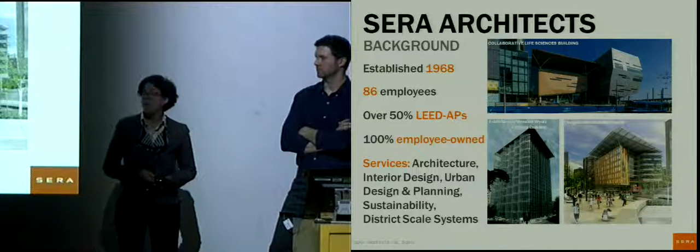These are some of the projects that we're working on right now. The Collaborative Life Sciences building, the top image, is in the South Waterfront in Portland. It's a new classroom, research, dental clinic lab for Oregon Health Sciences University, along with Portland State University, as well as the OUS system in general. The Oregon Sustainability Center here is a project that we designed meeting the Living Building Challenge, and the Edith Green Wendell Wyatt project that just opened this past summer, a LEED Platinum high-rise that's projected to be meeting the 2030 challenge. We'll quickly go over a couple of these in the slides just to warm up. It was actually kind of a progression for our firm on how to do integrated sustainable design. So we're going to quickly hit a couple of these projects on the way to EMU.

Quickly about our office. We are located downtown. It's very old town downtown, and that was done on purpose. We wanted to locate there to reinvigorate the streets. Sometimes coming out of the office at 4 o'clock in the morning, it's still a little scary, but Lisa knows more about the LEED. This was before I got there, but I know that downstairs we did LEED Gold and upstairs Platinum.

By the time we finished downstairs, we were already too big and had to punch a hole and go upstairs and take over the upstairs. I would say part of what I brought to the firm was when I joined, I said I have to have a model shop and I have to have a chop shop. And within the first 6 months, we have it.

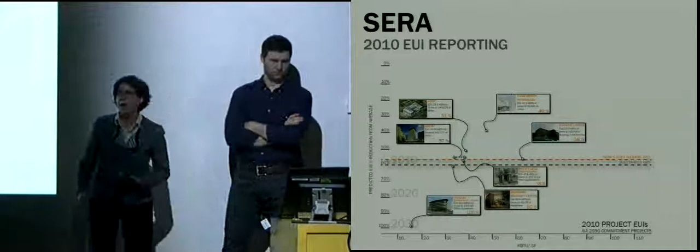Another important aspect of our firm is our commitment to the Architecture 2030 Challenge. And so we've been tracking our metrics since 2010. And basically we look at not only the predicted EUI, but also lighting power density, and use project energy modeling to help us to understand how we can position our projects. And that's particularly important as you start to look at how you can go about meeting the Architecture 2030 Challenge.

So this graphic is our 2010, and what you see on the y-axis is how close a project is to meeting the net zero requirement. If it's 100%, it means it's meeting the net zero requirement, or it's a net zero project. The EUI is actually what's on the x-axis, and so depending on the project type, the EUI would vary because, of course, what you're doing with the 2030 Challenge is you're comparing to the building that's a typical building for that particular building type. And what you see is SERA's average with a net zero project at 58% is barely just about at the 2030 Challenge at that time at 60%.

It's a tough challenge, and I know the University of Oregon has signed on to the 2030 Challenge, so I wanted to let you all know that as we're tracking this, it's tough, but we're out there trying to make it better, to make sure that we see how we can achieve it as we go along.

They tried to really evoke that emotion, and the reason I bring that up is we'll talk about this later on in the presentation, is what I try to get out of a client working with a large group of people is to get the touch, taste, and feel, the emotion of the project. If we could get that, if we could communicate together on that level, then I think the architecture starts to fall in place. So I was very impressed with this building.

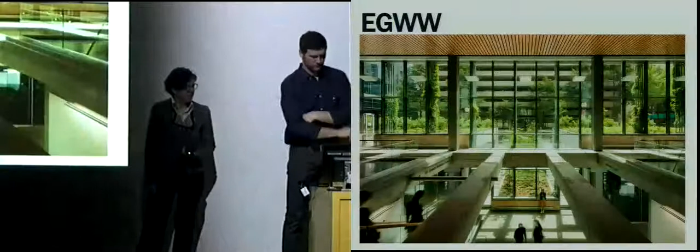So one of the important aspects that Jim really wanted to emphasize was to maintain the existing building character as we created this new high-performance high-rise. And so as you go inside, the old concrete beams were retained, even though we punched holes in them to allow natural light to go down to the main conferencing floor. And so it was this kind of juxtaposition of the new and the old as we went through the entire design process.

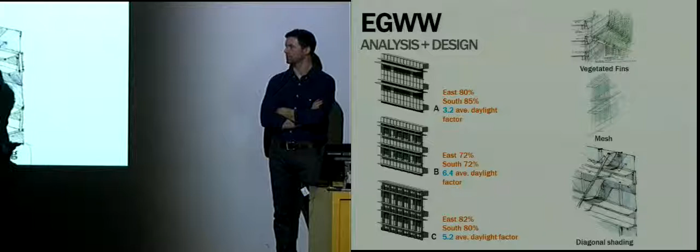And one of the important things that we looked at, and the reason that Walker and I wanted to do this together, is the idea of design and metrics working hand in hand. And so we first came up and looked at a series of daylight analysis and shading analysis to come up with some potential schemes that could work and meet the goals of the project, which we needed to meet the ARRA legislation requirements, which essentially are in line with the Architecture 2030 requirements. But then Jim went about sketching in the same way that Walker's doing, and it's this hand-in-glove idea, and we think that makes design better.

Same thing with the Oregon Sustainability Center. This was on a very tight site. Basically, the site dictated the shape of the building, how they're going to get to net zero. Lisa could talk more about that, but I think the beauty in this building is the fact that it was formed from the metrics.

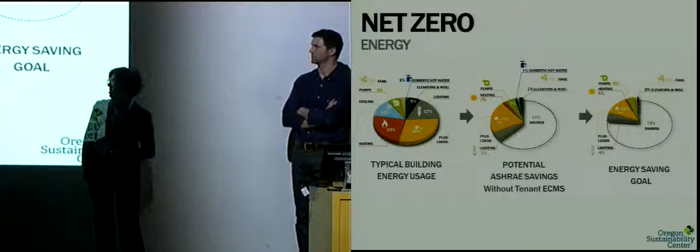One of the things I always like to talk about, I didn't even know John was going to be here, and I put in my favorite slide, is that we as architects can't do the design alone. We need to also rely on the building occupants. So what this is looking at is how do you go about achieving net zero energy. The energy pie on the far end is the typical building. We always start with what the uses divide up into in terms of the energy pie.

And then as we start to look at all of the ECS strategies that you've heard about in your class, natural ventilation, passive cooling, passive heating, solar, photovoltaics even, we still can only get so far towards a net zero building. Particularly with the Oregon Sustainability Center, with its very tight site, we needed to go even lower.

So we asked the building occupants, would they be willing to impart some different strategies, what we called occupant engagement, to further reduce the overall energy. Much to our surprise at the time, they said yes, we would like to employ things like having the janitors come in during the business day so we don't have to have that extra half hour or two hours of lights for the cleaning staff. No, we don't need super hot water in our bathrooms. And yes, we're willing to adopt different computing technology to bring down our overall goal.

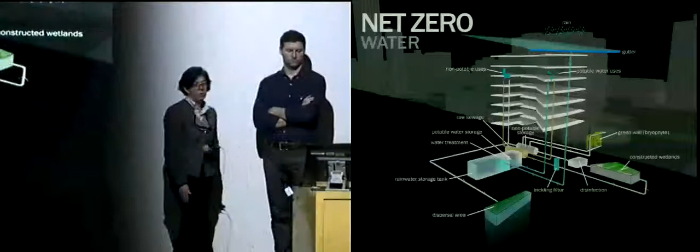With the occupant engagement strategies, using stairs instead of elevators, we were able to achieve the overall goal of the Oregon Sustainability Center on site with PV. And then that PV turned out to be what we needed in terms of the overall collection of rainwater.

So what this diagram is really showing you is the parts and pieces of the overall rainwater, or net zero water, collection strategy. But I wanted to point out how the photovoltaic array and the water system became hand in glove, jointly working together. We're always looking for what we call a twofer or a threefer. How can you have one thing that does more than just its single solitary purpose? Is there another purpose? That's another theme you're going to see as we talk about the EMU project.

So quickly, a little history on the EMU. I'm sure everyone here knows more about it than I do, maybe, but I did do quite a bit of research on it. I thought it was very interesting that it started off, it was Ellis Lawrence, it was the last building he worked on. It took almost 15 years from the time he started sketching it to the time it started to get built.

So it was taken over by his son, and I think that might be some of the reasons why it might look a little different than the other Ellis buildings. It's the most, I guess you could say, modern building on campus. It's a little bit more austere, a little bit more minimal, but as you'll see when we go through some of the analysis we did on the building, there's actually a lot going on in this building. It did a lot for the time.

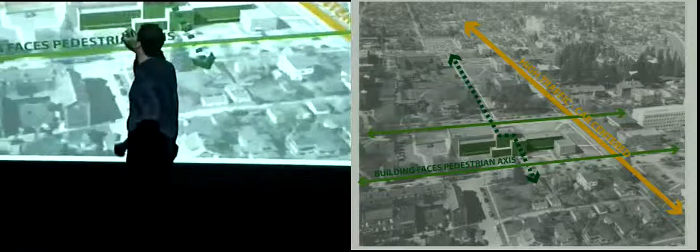It sort of on purpose got away from 13th a little bit, because at the beginning that was all cars. So this was very car-centric, and pedestrian access was actually in the north-south direction, and it had a very lineal, progressive layout. It lined up with all the axes on campus, and it had a very formal front and back—you would drive up to this main set of stairs. Now that times have changed and we're trying to really activate this street with people and not cars, that's some of the challenges we had with this building.

The 70s building, we looked at it and tried to do some analysis on how we could possibly save it, but it had very short floor-to-floor ceiling heights and was very inefficient. I do have a little story to tell about why it was a little inefficient, because we had some insight since it's what started SERA Architects. According to Bing Sheldon, it was built that way because someone in line got stabbed while waiting for food at the cafeteria.

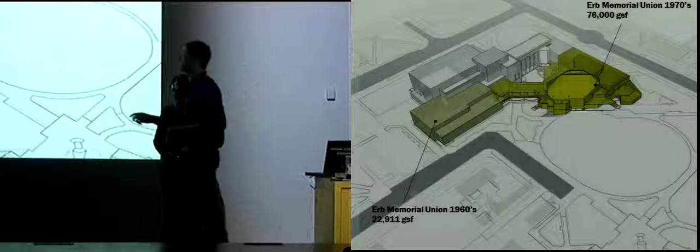So they said, what can we do to maybe break up some of these lines that are starting to come out the door, down the street? So the idea was, let's put food up top and make it a maze to get up there, so there's multiple ways to get up there. There's always a reason why they did things when they did it. There was also an addition in the 60s that's right now the fountain court. You'll see in the design we tried to use the 60s, but we just could not use the 70s building.

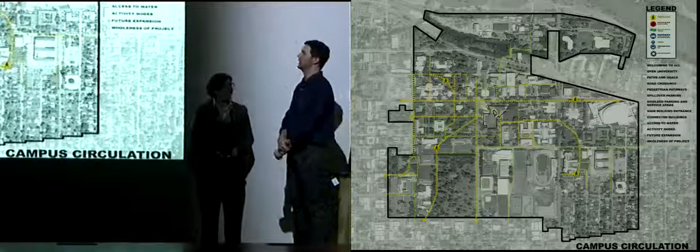I'll just quickly run through these because I think everyone here knows. But one thing I'd point out is we do student unions across the nation, and one thing a lot of colleges and universities would kill for is that this building is in the geographical center of campus. So it's already got a lot going for it.

When we work on other campuses, if something is located off to the side, we're trying to pull students to it. But right now, students walk right underneath the thing, or they walk around it. Next slide - lot of bicycle traffic.

Currently there is some bicycle traffic that goes under the building. It's actually not supposed to do that, so we're going to do a couple things to reinforce where bicycles are supposed to go. Some public transportation nearby, which opens up to the cars. This is what we were talking about earlier - we still have some car routes here. You'll see as we progress that maybe we'll do something to cut some of the car traffic off and give this back to the students.

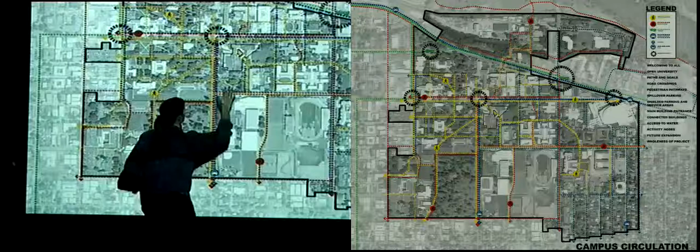A major node on campus - it's directly located. Another thing a lot of campuses would kill for is that it's right next to the major crossroads on campus, 13th and University. If you ask anybody where the center of campus is, it's 13th and University. But if you ask them where the student union is right now, I bet a lot of people wouldn't even know.

I come here every week, and it happens almost every single week - I'm standing right here looking at the building, talking to our fellow architects, and someone will come up and say, 'Do you know where the EMU is?' And I got to point - it's right there, but it's 75 feet back from the road right now, with 2 layers of trees in front of it.

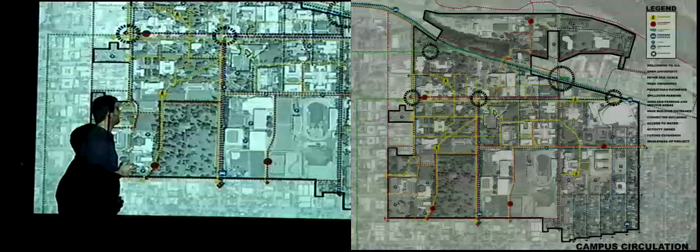So you'll see when we go through, we did a couple things to try to fix that problem. Up close, the reason I wanted to blow this up is there are also only a few places on campus that have parking. This building has parking as well, so there really is no back door to this building, and we have to deal with issues like trying to keep and maintain some of that parking that's here because it's vital for the conferencing that goes on in this building.

I want to point out again that right now people go under this building. So this was the big idea of the building - at the time we didn't really know how, but we said, how can we take this building and get people to go into it? Even if they walk through it for 5 minutes, grab a cup of coffee, read the paper, I think we've achieved our goal. We get more people in the student union.

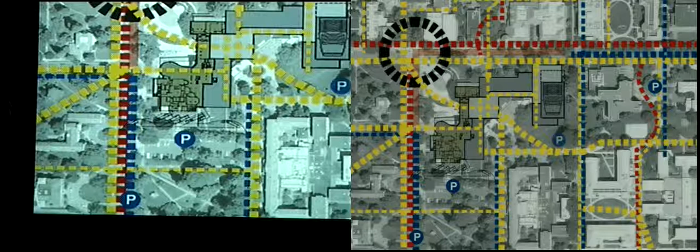Someone in the user group said a leaky building - not in terms of performance, but in terms of having a few front doors. So the idea is to start to capture some of this traffic that goes in. You're coming into this historic area - right now you go under the building, and what we're saying is very light intervention because this is the most historic facade in the building. Maybe we just do a set of glass doors, and now you come in - we'll show you later - you'll come into a double height space, a new hearth on campus.

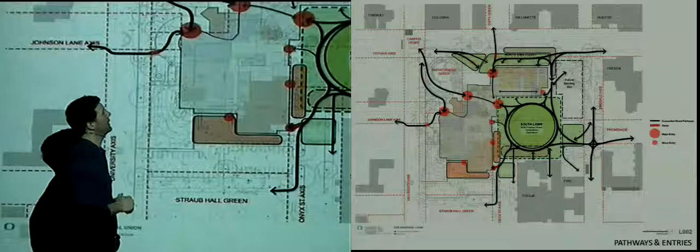Next slide. Another big idea was pushing this building north, getting it closer to the road. We went from 75 feet to 35 feet from the road. We've actually now increased our south lawn. This was very important to us to get more green to the south and less hardscape on the north. This is now going to be one of the largest south-facing lawns on campus. The design is set up for graduation, for events - a lot of it is key around the south lawn.

Another thing you'll notice is the multiple entries. A big concept is to get everything down to the ground floor. I'll go over that here in a little bit.

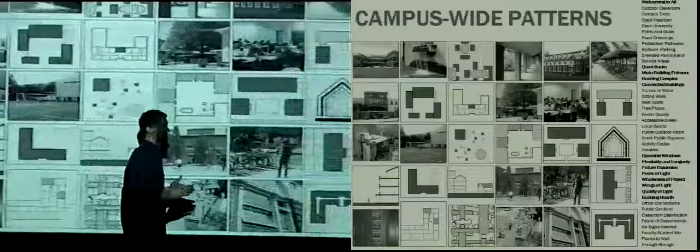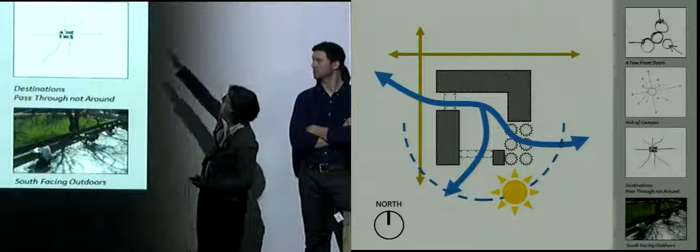Another important influence for the project was, of course, the pattern language. This is University of Oregon, so you need to involve the pattern language. Starting out the process, we went through and remembered our history of being students here and looked at the patterns. We ended up selecting these 10 as important patterns for us - things like being at the hub of campus, that's a great pattern for a student union, having a few front doors, the leaky building idea, the kitchen great room, who doesn't want the I Love Lucy setup? Light attracts use, that's a really important pattern for a student union, one of the overall prime goals. That was something we arrived at early on in the design process - how could we link these patterns together to come up with a partie that could describe the essence of this particular building.

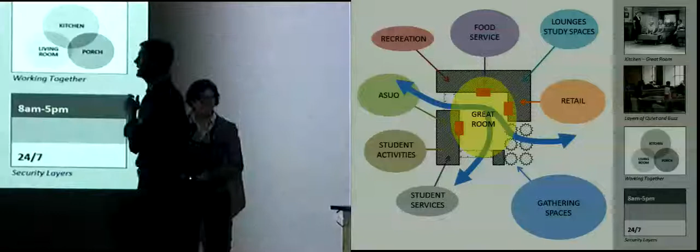Now we're going to start talking about working with the user group. We actually had these before we worked with the user group. We came up with them, and then we were asked to come up with patterns that you think are useful for this building and how that can generate some sort of idea for the building. So this is the exact partie we used. It was just this idea of creating some sort of park, some sort of great room that had multiple areas to bring students in through the building. Armed with the patterns, armed with this partie, and a lot of analysis on the building, we were able to then...

Meet with the clients, create goals, and some of the design drivers. This was day one, the very first meeting: recruiting students, timeless, multifunctional. We kept going back to this idea of timeless - we wanted it to be of today, but we wanted it to meld with the building next to it. Simple, enduring, not tech-based. I thought that was pretty interesting, that we're trying to come up with sort of a bomb-proof building. Simplicity.

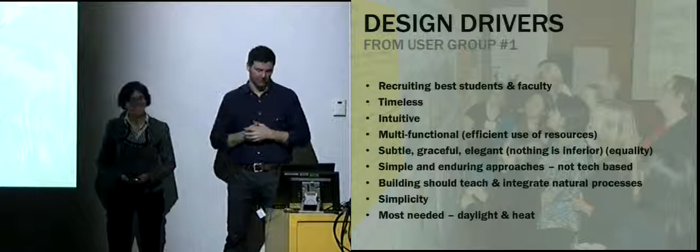Sustainability has been an important driver for the project from day one. The user group brought some of that, which you can see with their highest hopes and greatest fears - that was the list you just saw. We were also the first project under the Oregon Model for Sustainability, adopted in July of 2011. Energy - making sure we don't increase the overall campus energy - was one of the goals. Managing stormwater and making sure we manage the dirtiest water first was another important pattern. And people - making sure we engage the people, especially the students, in understanding the sustainability and how they're going to be saving energy and water in the building.

Those were really the three overarching goals, but we also wanted to make sure we brought some of these other elements. We started with a brainstorming session where we came up with three taglines of what we really wanted the building to be. We wanted to make sure it uses resources in the right way. We wanted it to be elegantly green, that it communicates to students and faculty what it's about, and that it strengthens and inspires the community. So these were really the overarching goals.

One of the things we like to do, which came from both the Oregon Sustainability Center and the EDITH Green Project, was to have specific metrics we could use to check back with the design team. If you have a specific goal, you're either meeting that particular goal or you're not. So we looked at these characteristics or categories and created specific goals. For example, in energy, our minimum goal was the Oregon model, which turns out to be 35% better than the typical standard.

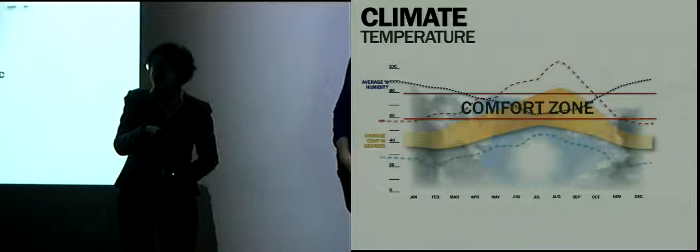I actually had an email from campus planning today talking about our student street and how many hours of the year is it going to be above that comfort zone, 85? And is that okay? And when are those hours? And is it okay to be above that temperature, or do we actually need to provide cooling to make sure we go into the comfort zone? And, you know, different people can disagree, but maybe it's okay to wear shorts on those days. Who knows? I guess I'm tough. I'm pushing to keep the student street. We could cool with fans.

So as we go through, the design process that we follow would be to look at the climate, understanding the base building loads, understanding how our building compares to the 2030 challenge or other goals, look at load reduction through passive strategies like natural daylighting and passive ventilation, address the building envelope because that's a part of the building that's going to be there for a long time. And then we start to look at the mechanical systems, making sure that they're right sized, that we have dual use, we incorporate heat recovery.

And then, of course, this idea of occupant engagement. That's something we want to bring to all projects because the people are really the users of energy, and anything we can do to help reduce energy load from the people is something that we want to do.

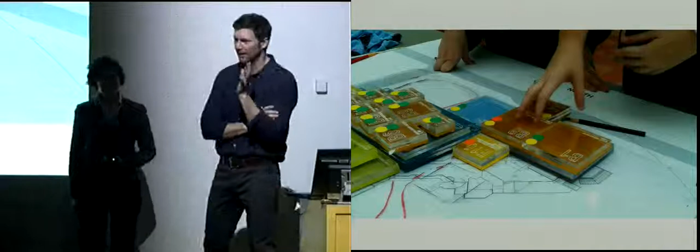So quickly with the scheme, we thought about this for a few weeks as a firm, and I don't think we reinvented the wheel by any means, but I am going to show the techniques that we used, and they were very well thought out, and they were geared towards working with a large group of people. We weren't quite sure how large, and it was 20, 30 people in the core group, and then we had students who would come in and out depending on the meetings. So it could be 50, 100 people.

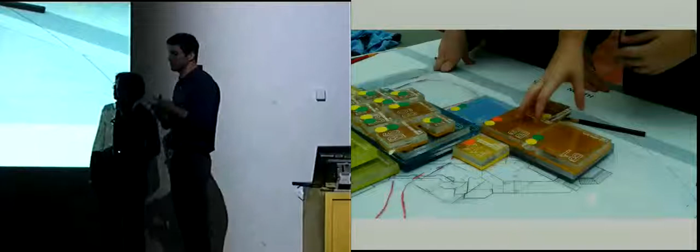We wanted some way to physically show the building on the site, and what we came up with was this idea of color coding the blocks for program, and then putting it on a site with a piece of plexi underneath it that I could physically draw on while we were talking, to start thinking of paths, maybe some other space that hadn't been thought about in the program, and that was stuff that I could sketch on the plexi itself.

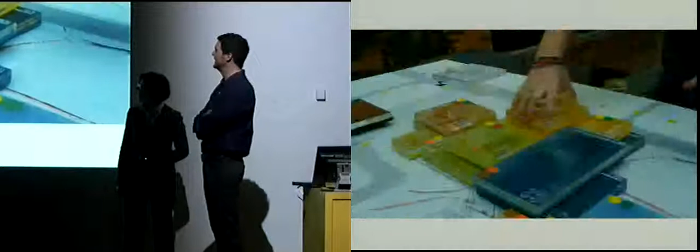We also introduced with these blocks the idea of energy programming. And so each of these are color-coded according to the program, like things together. All of the food service is one color, all of the student unions are a different color. But we added these additional dots to indicate whether the space wanted daylight. It had a yellow dot. If it didn't want daylight, it got a gray or a black dot, depending on the need for daylight.

We also looked at the heat capacity and whether the space would be rejecting heat or needing heat, and color-coded those in a red, yellow, orange scenario. We looked at the times of use for those particular spaces, and we had people first group them based on their typical programming, and then we said, well, you've got a yellow dot in the middle of your overall block. How's that going to work from a daylighting perspective?

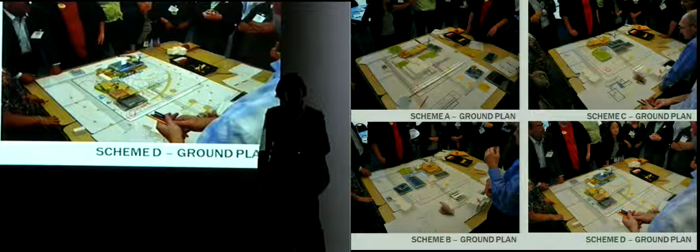Is there another way that you could do that, which would get all of the yellow dots, for example, on the exterior? And it was a really easy way for people to communicate and see not only are they developing the adjacencies that they want from a true programmatic perspective, but also from the idea of energy as well. So from that, we were able to come in one or two meetings. I can't remember which one. Well, we did the first 4 schemes in one meeting, and then got to the single scheme.

In the very first meeting, we hunkered down, spent all day, and were able to get these 20 or 30 people in the room. We took the blocks and we would arrange them on site, and as you can see, I would start to draw, like I said, that soft space, or maybe some other parts of the program that were not thought of originally would get drawn on, but we were quickly able to come down to 4 schemes, and I'll just quickly walk through them.

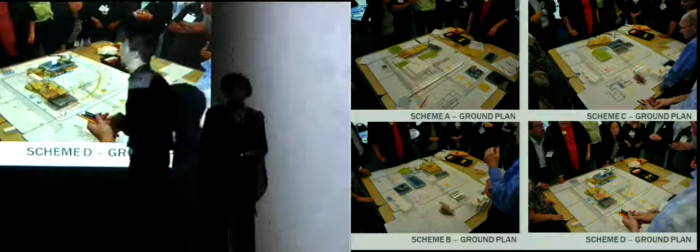We'll go through them, but one was sort of a double-loaded atrium. Scheme A, we're just giving them letters right now. Scheme B was, again, more of a double-loaded, but it was in a different orientation, more of the north-south, and we'll go through and we graded all these sustainably as well. And then Scheme C,

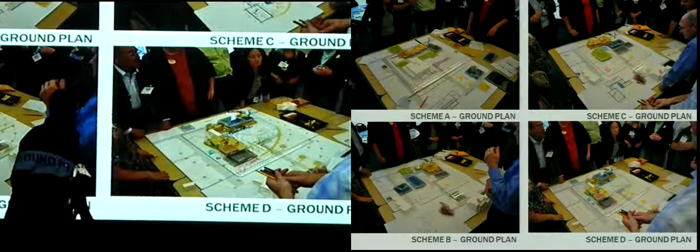this one we quickly lost because at the time, we had a performance hall on the backside, and it didn't allow for good access to the performance hall, so that one was dropped. We've since lost the performance hall, but at the time, that one was dropped. And then Scheme D was more of a single-loaded atrium facing south student wing, where we would try to locate as many programs that were appropriate for the 1950 building in the 1950 building.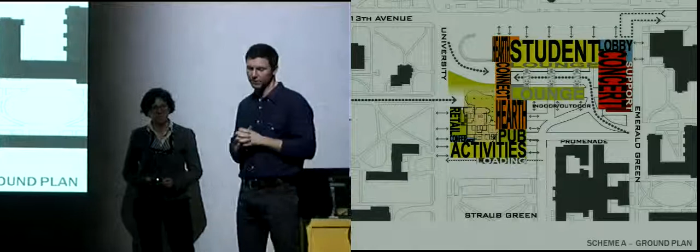So part of this thing that I was talking about, emotion, trying to get emotion from the user group, was we took those 4 schemes back, we stayed in the office for the week, and we tried to come up quick. These are not precious. Everything we do is try to not be precious. Instead, what we wanted was emotion. We wanted to just convey, these are not within inches.

These are sort of thumb up in the air. This is about the right square footage. This is about how this would fill it out on the site. So this is that idea of that double-loaded atrium, Scheme A, and just to quickly give visuals of everything we're at. That's why we use these large graphics, and we started to incorporate where some of the circulation would be.

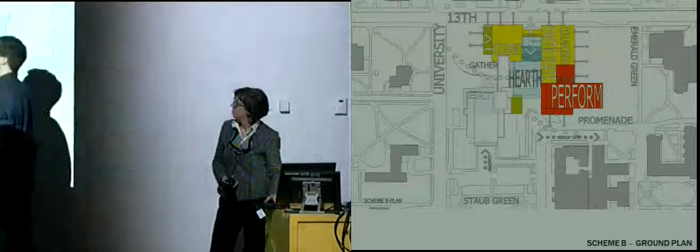Scheme B, again, didn't work so well because the Performing Arts Center, we said we would probably have to come off the back, and this would create parking back here, and there was a lot of issues with this, but this was something that the user group came up with, so we diagrammed it out, and this was one that we quickly lost. Scheme C, same thing. We diagrammed it. We wanted to show what the user group had come up with, but again, we sort of decided, because of the performance hall, that this was probably not a go.

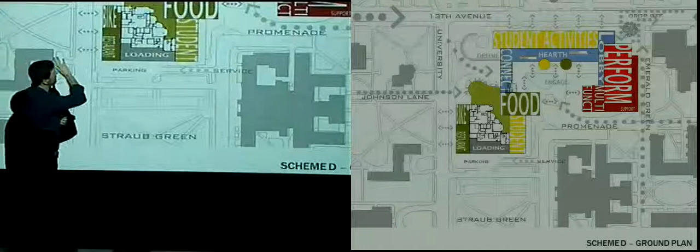Scheme D was this single-loaded atrium, south-facing, with a student bar facing north. I would say that one of the original schemes was to actually take the Mill Center chunk completely off and do all new student bar facing 13th, but we ended up not doing that.

So at the same time as Walker and the team are coming up with the diagrams, we're going through and testing them so that we can give the user group real-time information. So we do quick massing shading analysis so that we can understand not only what the building's potential is for solar and for daylight, but also is it going to be negatively impacting any of its neighbors.

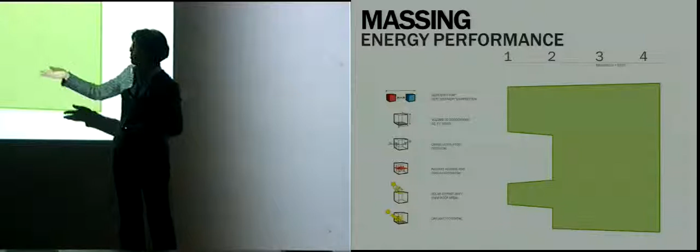We also run shoebox energy modeling, and we specifically looked at 6 things. The top one is how good would the scheme be for adjacency for heat recovery distribution? How well are the spaces aligned? What is the skin to volume ratio, which has a direct effect on your performance, the cross ventilation potential of the scheme, the radiant heating and cooling potential, solar opportunity, and daylighting potential.

And quickly read this diagram. The greener it is, the better, because we're grading the schemes, and if you got a 1, then you're all the way green. And so as you see, Scheme A had the most green, and Scheme B was really, C and D were second. But one of the interesting things was Scheme D had the top rating in 2 of the most important criteria, the potential for daylighting and the potential for cross-ventilation.

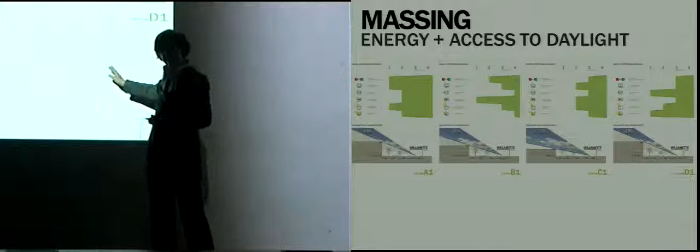And so the user group was very interested in Scheme D, but wanted us to learn from Scheme A. And so we ended up with really an amalgamation of Scheme A and Scheme D. And I think one of the successes of why we were able to so quickly arrive at a specific scheme was being able to, at the same time as we're giving them information about the programming and how the building is, we're also giving them real-time information on the sustainability elements of the overall design.

Once that was determined, once we had a couple of schemes, that's when we started to do a lot of work in model. And I chose to show more of the finished model, but there were many, many iterations before this. But again, on the models, I like to show circulation. I like to give a little bit of emotion as to what would be happening in this space.

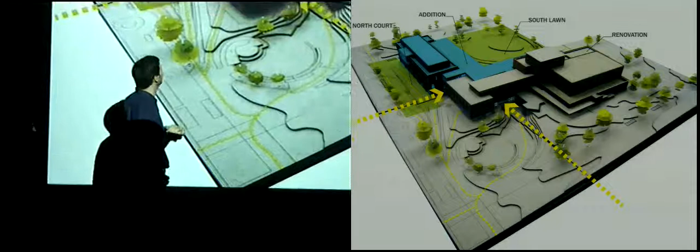Next slide. But what we ended up coming to as a conclusion for the group was that we would take this new student wing, efficient, super efficient student wing. It was not hard to be more efficient than the 1970s building. We pushed it 30 feet forward. So this is 13th. We decided on giving ourselves a plaza, a student street, we're calling it.

So we have the street, then we have a student street where I can imagine in summer they'll put tents out there. The bike program is located on the ground floor. They'll have all their bikes out there. It's a place where I think you bring what's happening down here, some of the markets that go on, and I think it'll continue right under the face of the new student union.

What we have on the back is that south-facing triple height, mostly glass. We'll talk about that in a little bit. And we've increased the south lawn; this is bigger than a football field, the south lawn now. And it's fairly simple architecturally, and that was done on purpose.

The user group wanted it to be flat, not a lot of trees in that space because they want to be able to have graduation there. They want to have ceremonies there. So there's a reason why it is fairly simplistic in the back. Next slide. This idea of the south lawn and this accessible building, this is right about the time when we said, okay, currently there's a basement and then there's a ground floor.

And so what we would like to do is turn the basement into the ground floor so that this south lawn now, everyone can come off the south lawn and walk right into the building. There were a lot of feats that had to happen to make that work, but if we go to the next slide. So this is just a figure ground of the current basement of the 1950s building.

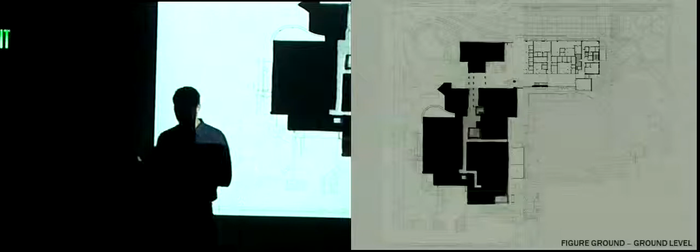And the reason I call it a basement is because there's very large blocks of program, tiny little hallways to get to this program, and that's where the student unions are located. You go down a CMU-lined hallway, and they're behind closed doors. And so, next slide. This is what we propose for the ground floor now in the new building. What can we do to really open it up?

And what we did is we took some of the more underused space and we tried to interject program, and I'll go through the program here in a second of what could be in these spaces, but really it was more the idea of, at the time, I didn't know exactly what we would do to make this happen or why, but what we wanted to do was really open up this building. So 440 is basically ground level. So now everywhere in the building you can come in at 440.

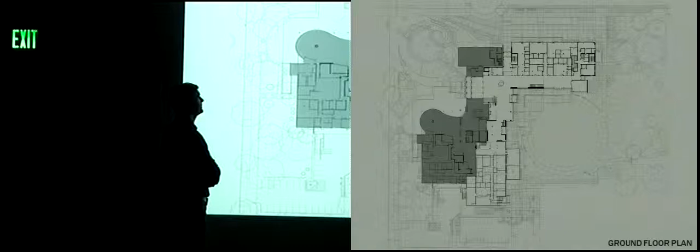This is a floor plan of the ground floor. Phase 1 is what we're doing right now. It was great to go see them. They're taking it apart. And before we can build the new student wing, we have to take the Craft Center, which is actually the #2 in the nation Craft Center. I was impressed. We toured a lot of Craft Centers. This is a very impressive Craft Center.

So we want it to be able to function, run. So it's going to continue to run while we build them a new Craft Center in the ground floor of the 1950s wing. It's very easily said, but then to put basically a shop in the ground floor of the 1950s building took a lot of effort, but we were able to figure it out. So phase 1 will be constructing the Craft Center.

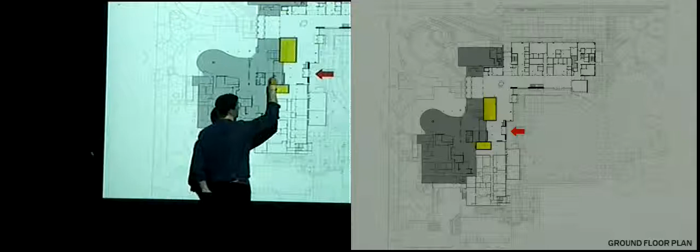Next. After that, what we're going to start doing is we're going to punch a couple of holes into this, and have communicating stairs. So now from ground floor up to the food, we have a grand stair with skylights above, which will bring light down. We've also said, okay, let's take this historic landing, historic entry to the building, and let's express that in the building. So we're going to have a grand stair that you come in off the ground floor, come up these grand stairs.

Now, with that space that used to be sort of the dead stairs, the center of the building, we've coined this the O Lounge. It's going to be a lounge space for the students. It's one of the only places in the building where we have the O, but we actually have a giant O on the ceiling that'll be very hard to read. It won't be blatantly in your face, but we've done a lot to sort of invigorate this space.

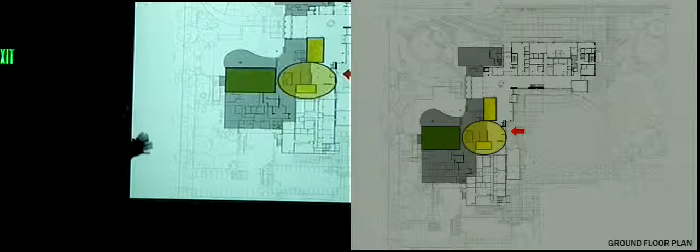And then off of that, this was back and forth and back and forth. It took over a year to come to the conclusion, but we are going to have a pub in the student union. Big round of applause. Yeah, nationwide universities went to this trend of let's get drinking off of campus, and then they realized that students would drink off campus and then drive back to campus. So now they're saying, okay, let's be responsible drinking on campus. So we are going to have a pub on the ground floor.

And again, it was one of the spaces that we couldn't bring a lot of light to because this is underground here. So I think it really utilizes the space well. Then we're going to build this new student wing. Like I said, we shifted it 30 feet up, so now the ground floor of this is the one spot again where we use a little bit more glass. It is storefront. And the reason that you have a storefront is psychological. We want people to see in, we want people to see out, we want to really highlight the uses that are in this space.

And then some of those uses are bike center, ASUO, sustainability, and what else? There's one more. Resource. A lot of student activity on the ground floor. And that will all be connected, next slide, with this atrium.

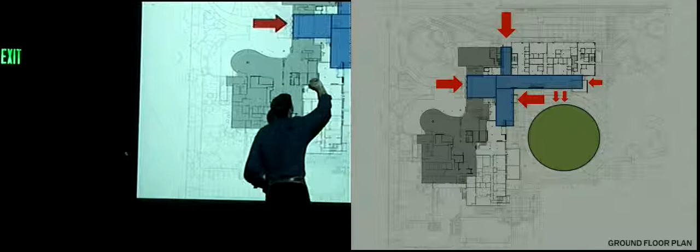South-facing, 3 stories, 2 stories, with a new entry on 13th, and then a very light touch off of the existing. Right now you go under. What we're saying is just maybe just plate glass. You come in. It's set up to where you can have a vestibule, so there'll be 2 layers of doors. You'll come into a slightly compressed space as you walk under, and then you'll open up into this new student street. And we'll show you some images of that in here in a minute. So all together, this is sort of the new ground floor of the student union.

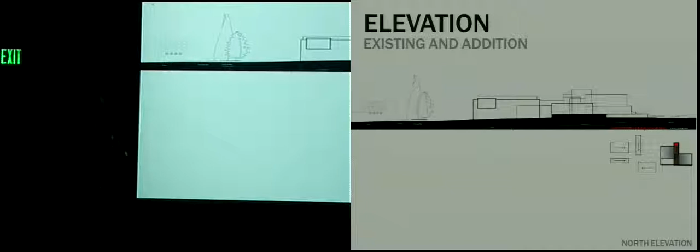We started off with just basically what was this existing 1950s building? How did it connect? What were the different volumes? What were the different massings? What we saw was that it really culminated around the center of this building, and then it sort of reached out in the landscape. There wasn't a whole lot of program at first, so I think it purposely sort of stretched itself out to be a little bit more commanding on site. We looked at different rhythms of the current openings around the 1950s, and how can we start to use that same rhythm on our new student wing.

Again, top, middle, and base. Very important to have a top, middle, and base. We wanted to show some ways that they did it on the 1950s building with this almost arcade middle, and then they had a very thin, which is a little different than the rest of the campus, almost blade-like top. And so we said, how can we do some of that same moves on our new student wing?

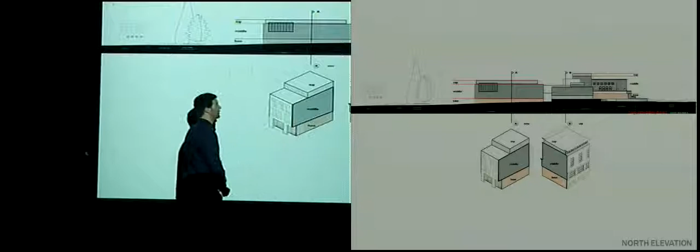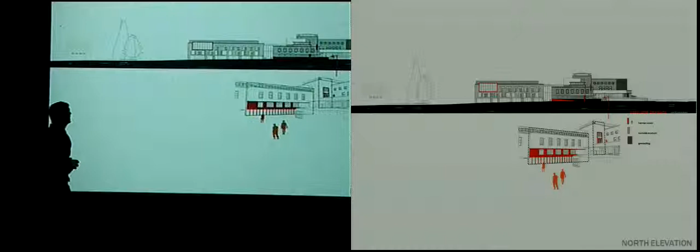And then there were a couple areas on the 1950s building that had, this is one of the only buildings on campus that actually has limestone. And so we are saying maybe in some of the areas we're going to actually use real limestone on our building. And they would group these large groups of openings together to sort of say, there's something here, special spaces. So we said maybe in our one spot that we used to have a performance hall, we don't have a performance hall anymore, but we do have a multi-function space. And in that space, there are going to be performances. And so maybe there's something special that happens here, and it's of higher quality material.

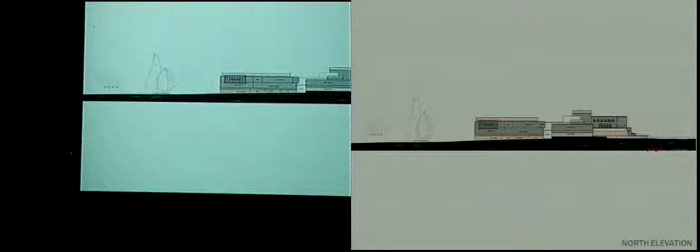And then lastly, we overlaid the program on it. We know that ground floor will probably always stay the programs they are, or very similar to those programs, and then maybe the middle 2 floors, we could program them more as office space, because they will be student functions, but the student unions, they fluctuate in size. A single office might grow or might shrink, so we want to keep the top 2 floors more office-like, and then that special space.

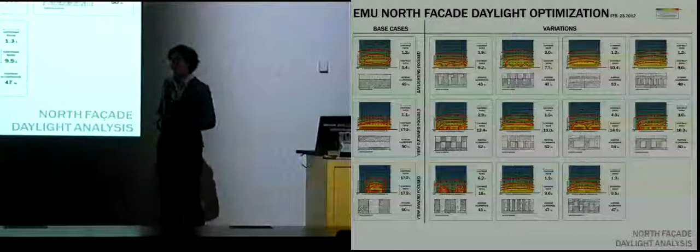So just like we did with the building massing, as Walker and his team was developing the overall strategy for the building elevations, we're also providing sustainability metrics. Now, how many of you know that Oregon Code mandates 30% glass? It does. You can get around it through different ways of modeling, but actually per Oregon Code, you should be starting out at 30% glass. And so we took that as literal. How can we do the best building possible?

At 30% glass, at the same time, we're going to meet our daylighting metric, which was a 50% daylight autonomy for at least 75% of the spaces, which means at least 50% of the time you have usable daylight in those particular spaces. So what we did was this analysis, and the base case is over on the left side of the screen.

First, if I just put my 30% glazing for the absolute best for daylight, I'd put it all at the top of the space, close to the ceiling, so I could get that daylight deep into the space. But that would be kind of a crappy building to be in, because you wouldn't be able to see out.

So then we said, well, if I was to orient it for view, where would I put it? I'd put it in that band that's between about 3 foot and maybe 9 feet. And you know what? It doesn't do so good for daylighting. All you can see is all of those red lines closely grouped, which means you have a pretty high contrast ratio.

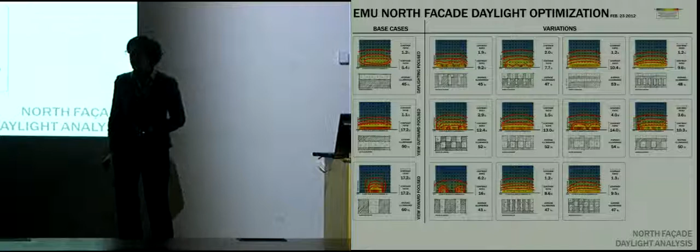And then what if we maximize daylighting for view in? Maybe we do a vertical slot of windows. And then we said, okay, well, how could we rearrange that same 30% glass in different patterns that take advantage of daylight and view in, and come up with a methodology to analyze them. We're looking at not only whether they're meeting the overall illuminance criteria, this 50% daylight autonomy, but also looking at the contrast ratio. How even is the light?

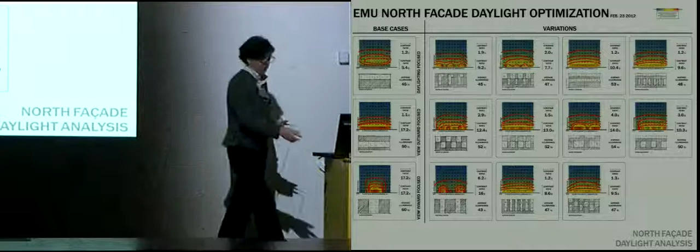Because really what daylight suffers from is if it's too bright at one side of the room, it feels too dim on the other side. It's not that you don't have enough light, it's probably plenty fine. But if it's too much contrast, then you're going to feel like that space is dark. So we essentially set 10:1 as our contrast ratio maximum, and said these three schemes all meet that 10:1 contrast ratio from front to back distance. So, Walker, any one of those, I'm fine with it. Just do that, you're done.

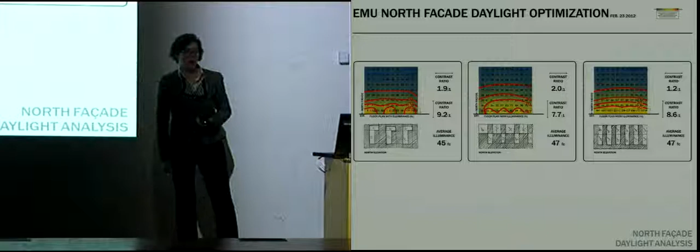So really what this looks at is how we're going about doing the metrics. We actually use a program called Diva, and it has a plugin that we've developed, a customized piece of software using Grasshopper, that allows us to quickly get these metrics so that Walker doesn't have to wait 2 weeks till I run all these metrics.

They can basically be run overnight, one day. Go back just real quick - these were just sketches. Like we said, I did 15, 20 of them. They were all just sort of ideas. They weren't meant to be exactly what was going to happen, but what it did is it gave me a really good baseline to then start working them into the elevations.

I'm also very big on, I know the daylighting, I know the metrics, I know the numbers, but I'm also very big on visual, on how I'm going to feel inside that space. Again, I want to go back to that feeling of being inside that space. So I wanted to take some of these arrangements of windows and just generically, quickly - all this stuff is quick and not precious - so that we could bring it back to the user group and have them weigh in on it on a weekly basis.

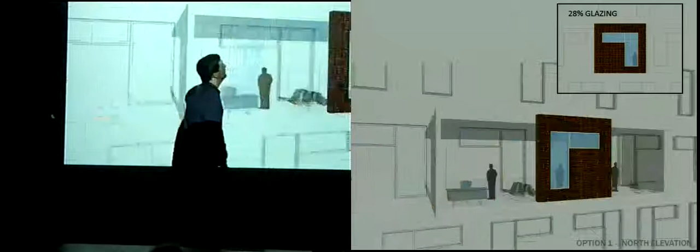This was turned around every week. So this was the idea of 30% glass and more of that L-shaped configuration, of what it would look like inside of a space and what it would look like on the elevation. Again, that same amount of glass on the outside, exactly what it could look like for us.

And then we take 30% glass and we said, okay, well, what if we break it up? And what that could look like inside and what it could look like on the outside. Maybe some of these spot spaces where we have more of that high window, that L configuration - I think that you would use those in areas where you're not right up next to the wall and it's more trying to drive that light in. But then maybe in areas that were more loungy areas, we would do more of these larger expanses of glass.

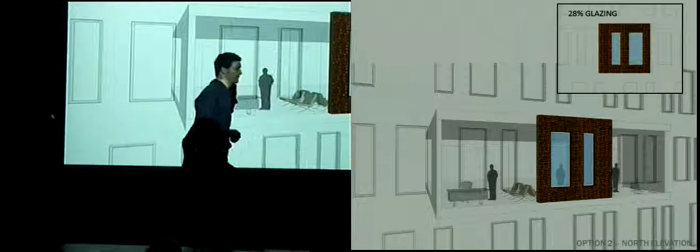I wanted to see, okay, well, I like my floor-to-ceiling glass, I do a lot of floor-to-ceiling glass. So what would that look like in the space? But when I'm looking at it from the inside, to me it wasn't as powerful. Okay, well, yeah, you do have floor-to-ceiling glass, but 30% of it inside of a space is giving you a lot of blank wall. So right there it sort of convinced me that we are only going to do this floor-to-ceiling glass in very special locations in the building.

And we actually kept it very minimal when we do that. Again, what it looked like on the outside—this is that overall north facade.

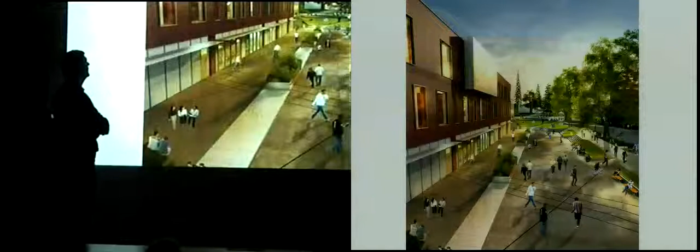You could see that in areas where we are going to be right up next to the windows, we tried to do that configuration of sort of the two side by side. And then areas that were more office space, where you're trying to drive that light in, we have it L-shaped. It's a little hard to tell in the renderings because the metal panel creates the L shape in it.

And this is, quickly, I love this view, just showing that new street—you can imagine tents out here, bike parking along the entire length of the building.

South elevation, same thing. I was really hesitant about the south elevation—I can't stress how much—having this 3-story tall atrium space that, in my mind, obviously had to be all glass.

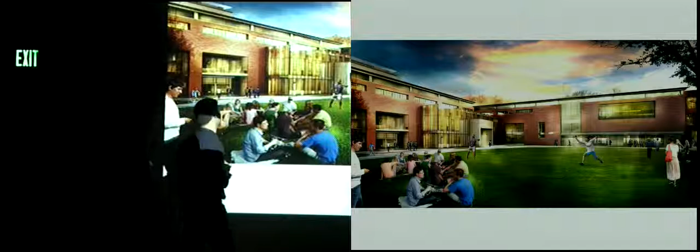It's an atrium. And so through a lot of studying, we figured out how to break down the percentages. But again, overall, we wanted it to feel like it was of the same building, had a lot of the same characteristics of the building.

So we did all the same studies, showed how the volumes connected, talked about that rhythm, a lot about some big punches on that south face right now where the eating is. They have that big south punch, so that was a big driver for maybe we do some of these more punch openings in the brick.

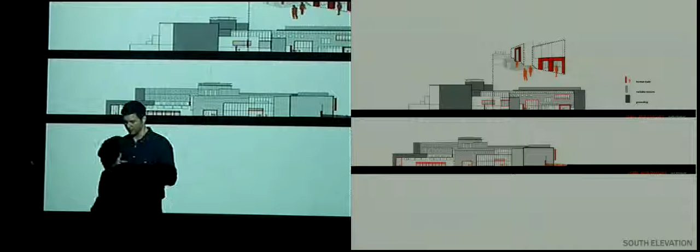Top, middle, and base—again, very thin lines of tops, so that's what we wanted to bring into our building. And in some areas, that historic entry that's on the backside, limestone, real limestone surrounds. So maybe in areas where you're going to interact with this building, where you're going to pass through it, where you're going to be able to come up and touch it, we would use real limestone.

And again, programming, we wanted to overlay it. But what I think was really important for the south elevation was the fact that that program is going to be 25 feet back from the wall. And so that really needs to inform where we put these windows, because we're trying to drive that light into the student spaces. So we looked at it.

Option one, I can't remember what percentage glass is—78, so about 80% glass. We said, well, what if we looked at this, and you can see that when we had 80% glass, we had to also incorporate a lot of horizontal louvers into it. But here it is. This is 80% glass.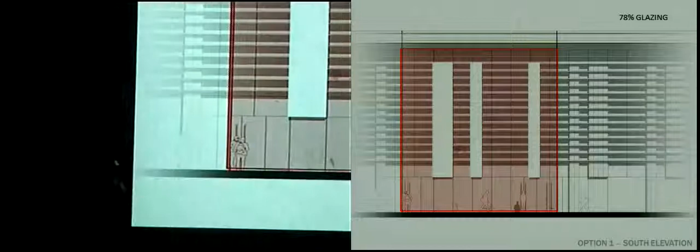And more importantly, this is what 80% glass looks like on the inside. Love it. Sold. Boom. Let's do it.

But we can't do it because we need to keep our percentages down. So, okay, how can we still have that feeling? Well, let's go down to, I think this is about 60% glass.

And what we did is we said, okay, these were metal panels in option one. Now we're going to start to incorporate some brick for option two. It thickens up a wall.

Again, inside—this one I actually wasn't so thrilled about. I thought that it started to feel a little too claustrophobic inside.

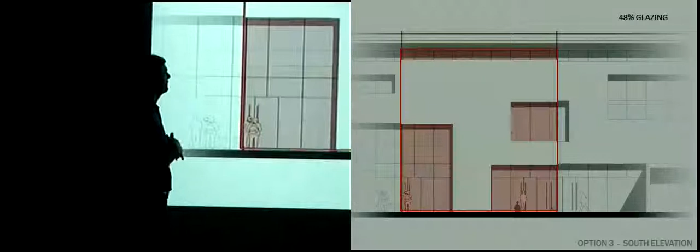So option three was, let's go to this idea of punches. And I think we got down to about 50% glass, 48% glass. So overall, the building is 30% glass.

On the south elevation, it is 50% glass. That's as low as I could go—it was 48% glass. And what we did was we strategically placed punches where they relate to the program beyond.

And on the interior, you know what, I felt like the user group, we all felt like this is pretty good. This, even though it's only 48% glass, it feels very open on the inside and relates very well to some of the big moves that we're doing on the inside.

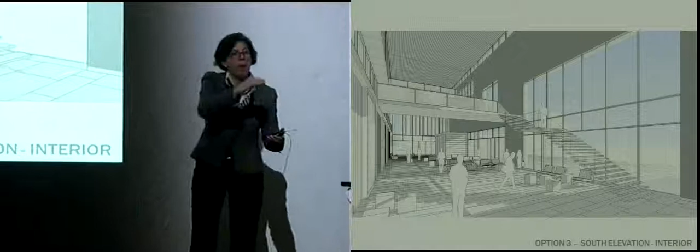So in addition to, of course, thinking about daylighting, which you can see the clerestory that's along the top, which is next to a 3-foot deep sill—that's really the thickness of the wall that allows that daylight to bounce onto the window—we're also thinking about passive solar gain and how we can use the concrete slab to increase in terms of the heating season.

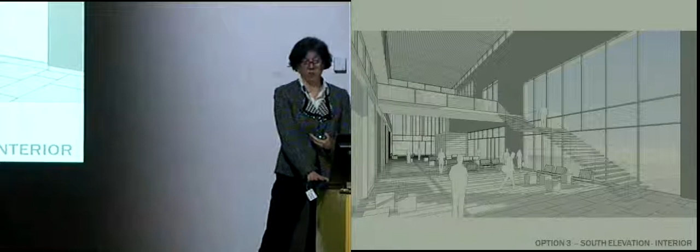This is the space we're talking about for the cooling season, where we have about 85 hours of the year that are potentially above our target temperature. So we're looking at incorporating a radiant system in the slab of the main floor to help drive that down, which would still incorporate some passive strategies, as well as fans and natural ventilation.

Similarly, we did a daylight analysis of the overall atrium space. When we first started, we asked how we could achieve daylighting on the south side of the student street through this atrium space, and we looked at skylights and clerestories. Of course, skylights also bring excessive heat gain in the summer because of the high angle sun. So we tried to figure out ways to improve the clerestories to arrive at a scheme where everywhere you see yellow is essentially useful daylight beyond what we'd need in terms of not having electric lights on.

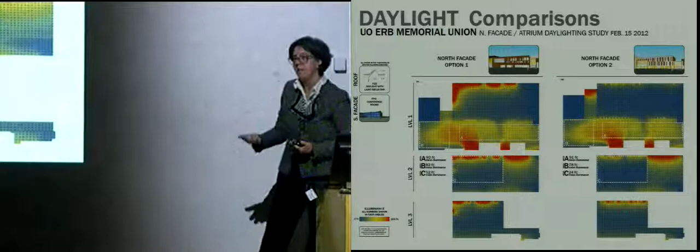She kind of browsed over it, but these are 3-foot thick walls — the south wall is 3 feet thick. It's doing a lot of its own shading of itself. So there's going to be some play in there of how this light shelf comes in off the top and bounces that light in.

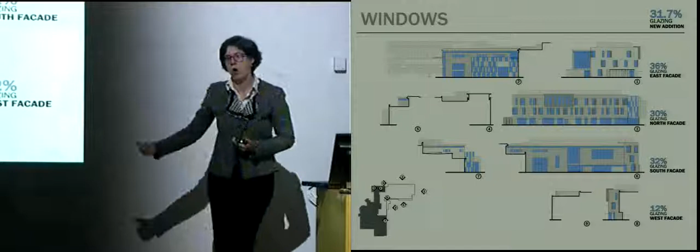So here's the overall analysis of the overall elevation. As we talked about, more glass on the south, although overall the south is really only at 32 percent when you take into account all the sides. Of course, the least elevation you'd desire glass is the west, so we're minimizing glazing there — 30% on the north, the study to show, and 36% on the east, for an overall total of 31.7.

One of the last things we do in a project is look at how it compares to LEED. The Oregon Model for Sustainable Design mandates that the project achieve at least a LEED Gold scorecard, but in our process we don't focus on LEED points. Are you going to get the bicycle parking point? Well, of course we are — it's U of O. We try not to focus specifically on points because that leads to point trading and doesn't really achieve the overall goals.

We are currently tracking 80 points, which for anybody who knows is the threshold for Platinum. So we call it LEED Gold because that's a pretty narrow margin, but we're looking at additional strategies such as a task-ambient approach for our electric lighting, as well as other things like FSC that might come back down the road to allow us to achieve LEED Platinum. But again, the goal was gold.

At this time we didn't know about the FSC, but we have learned that, and you'll see in the renderings, we are using FSC wood, and it is a wood structure inside. A lot of that's not an easy sell to a user group, only because it hasn't been done a lot, and when anything hasn't been done a lot, it's kind of a hard sell.

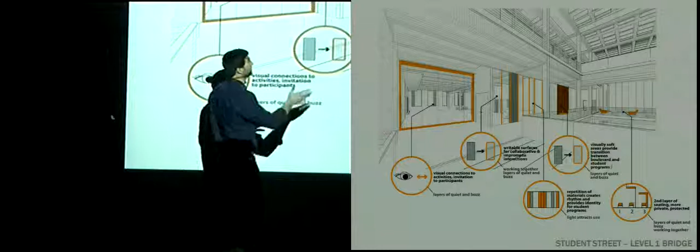Some of the ways we formed the discussion went back to our original goals — this is what we wanted to do. Instead of just hitting someone with a rendering and saying 'this is what you get,' we'd much rather present diagrammatic images like this, saying this is some of the stuff we said was important as a group, and these are some of the areas and materials we think could achieve that.

One of the other things important in our overall design process was figuring out how we can reuse the 1970s building in our new facility. For those of you who've been there, you know there's a bunch of glulams that are used as handrails.

There's great wood in the ceiling. We've got lots of concrete, and we've got lots of glass. And so we started to think about how could we incorporate those materials in the existing building. And so as we started to frame the windows, we're cutting down the glulams and using those to frame the windows and provide a little warmth at the window itself.

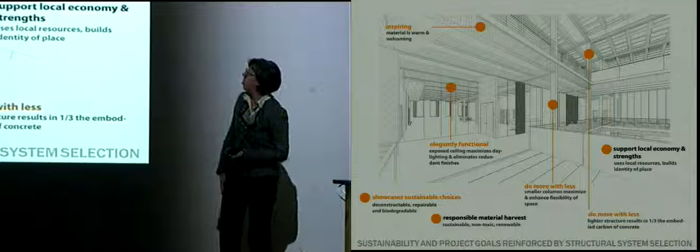We're grinding up the concrete and being able to use that as part of our aggregate and part of the flooring. And then the overall look and feel is really to incorporate the idea of doing more with less, exposing the structure as Walker talked about, but not having a lot of additional finishes on top of the finishes that we have. So we're really trying to only augment with existing materials from the 70s building.

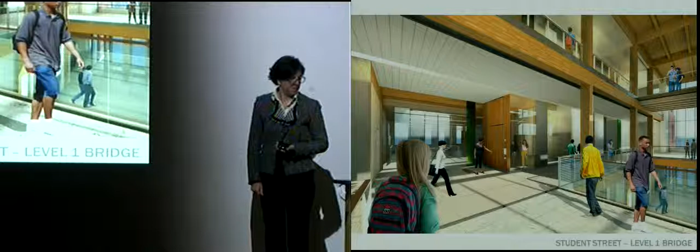That was important in figuring out the cost of the wood structure, is that we had a large budget in for wood walls, wood slat ceilings, and we incorporated that into, okay, we're not going to do that, and so that helped to offset the cost of the wood structure.

And lastly, after we walked through multiple iterations of more of the black and white, then we start to bring in these renderings. And again, I always stress that these renderings are quick, they're done quickly, they're not about down to the doorknob or where the toilets are. It's more, again, is this the feeling that you, the user group, want this space to have? And it was pretty much overwhelmingly yes.

And we did show this rendering twice. We showed it with a concrete structure, and we showed it with the wood structure, and overwhelmingly we wanted the wood structure. This is looking back against that south wall, and these are those large pieces of glulam that we're going to reuse that Lisa was talking about. We use that in multiple locations to frame these very large openings.

And this is the new heart. This is where one thing that we did not do a very good job of until they saw this rendering was understanding the idea that the historic 1950s building. Or explaining it. Yeah, we didn't do a very good job of explaining it, that this was actually going to be inside now. I mean, we all knew that we were coming in underneath the building, that we were going to come in through these sets of glass doors, and that then you would be into this space.

But it wasn't until we showed this rendering that everyone was like, wow, there's the 1950s building. It's now a room inside, so it provides some of the interior finish and the richness inside the student union because of the era of that particular design.

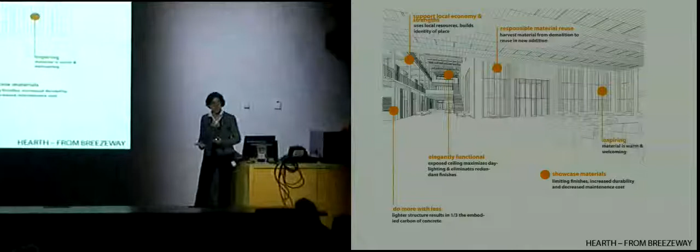Another option we had was that maybe they are something that opens up when you want them to, closes when you don't. But we settled back on the fact that we're trying to do as little as possible on this historic facade. And so, again, the same ideas as we were talking about before, where we're looking at how we can incorporate the materials from the 70s building and really create an overall look and feel that's really cohesive. Using inspiring materials, showcasing what we have, limiting finishes, making sure the finishes we have are durable, and making sure that overall it's a cohesive whole.

Just wanted to leave you again with this is a quick rendering. Everything's not absolutely figured out. We are now probably 50% through with our interiors package, so now we're much more figured out than what this rendering was, but I actually prefer showing sort of the in progress, quick renderings.

This is what we showed the user group coming in historically underneath that building. You're going to come in through a low spot, and then underneath the Taylor Lounge, and then you're going to come in, and this is what you're going to see. The heart of the building, stairway up to the student bar. And I think what this shows is very clear communication of direction and a very wide open space.

We'd be happy to take questions that people have.

John? I guess I really enjoyed this presentation. The big question in my mind is I didn't hear anything about either seasonal or movable shading. Would you mind repeating the question? Yes, so John was asking a question about seasonal or movable shading.

So we had originally incorporated an idea of a sunshade on the exterior, which Walker had showed you when we were talking about the overall exterior when we were going with the higher glass. We will have seasonal shading in terms of the interior blinds, but we could not afford under a VE any exterior shading.

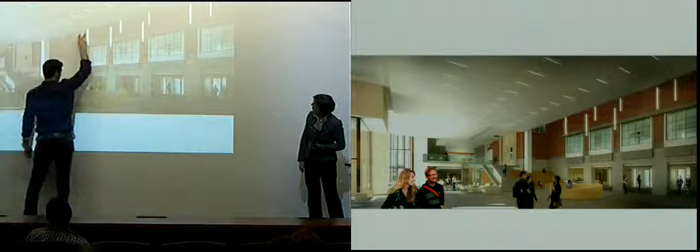And then also, we're going to incorporate something. This is a whole design charrette in itself that the university wants to go over, is the front desk, what it's going to look like, where it's going to be, and some of the lighting incorporated with it. So I do think eventually there would be something associated with the front desk that will break up that space too. We're suggesting possibly a mobile front desk, or a front desk that's actually inhabited space.

Some of those things are way out there, but we are trying to push what's typical of a front desk. And that's going to be an entire design charrette with the university here soon. But we have a whole set of slides just for sort of this space. Or isn't even this space. What if it moved over and it was more incorporated, more along the south wall? We have a lot of different ideas of what that could be.

You're talking about using FSC lumber? Yes. What does that stand for? And also, what were some of the things you were thinking about when deciding to use it or not use it? Forest Stewardship Council certified is what FSC stands for, and it's basically a certification process that tracks how the trees are grown and makes sure that they're sustainably harvested. And so incorporating FSC is, in essence, the idea of making sure that the trees themselves are sustainably harvested.

The question that you were asking about, how are we ensuring that it's incorporated? Or no, like you were saying you just decided to use it. I was wondering. Well, we have to price it. And this is the first time I've ever been able to use it, because generally the price comes back shockingly high. And for whatever reason, I don't know why, it came in. Market driven. It's always market forces. For this particular project, we'll be able to do an all wood structure, and it came out almost equal. We did have to incorporate the fact that we were going to do more wood walls, more wood ceilings, so we took that money to make it zero out to be able to do a wood structure.

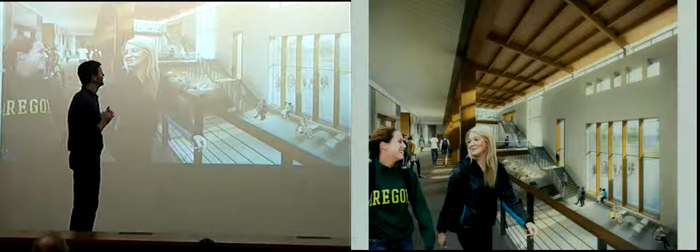We don't have an unlimited budget, so this wall is staying fairly pristine, fairly blank, but I do think the fact that we do have that 3-foot depth, we can start to incorporate some art into that. We could do seating areas. I want to do something in this wall. I keep pushing for it, is somehow to show every student that ever graduated from the University of Oregon on this wall, somewhere, somehow, and let it continue as the years go on. I don't know how we're going to do that yet, but I think something with that depth will help us do something like that.

Then I think to answer your question, technically it's a double cavity wall that has insulation on the interior face, so it's brick on the outside, and then we're looking at interior insulation in the cavity wall itself. So that was a big important driver to really drive up the overall wall insulation, put our money in the envelope where we're essentially going to be paying back over the 40-year lifespan or longer of that particular element.

And the structure is actually all wood except for this face is steel, and there's a lot of steel in there because it's taking up the new student wing, but it's also having to incorporate a big break seismically from the 1950s building, and the fact that these are large punches, the structure itself got really massive and thick. And having the deeper wall allows us to have a true thermal break from the steel to the exterior wall. So that was another important driver for the overall.

Somebody else had a question. People over there. Are you going to be able to use any of the wood floor from the 1970s building or the furniture from that wing? Unfortunately, not on the floor material. There was asbestos when that particular material was laid down. It's all over in the 70s building. So that wood floor, we tested it, and we won't be able to use that particular one.